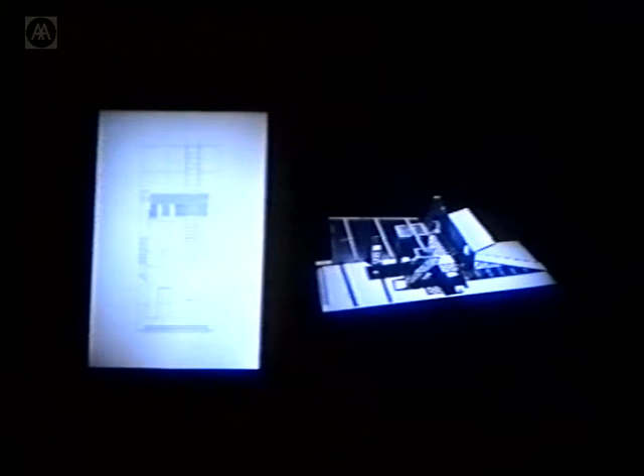It had an open interior. It had no doors, no enclosure. It was just an open pavilion, so you walked into it like you would into any shed. Inside it had some specific installations which were related to the themes and topics of his paintings.

Externally, it had a different expression. It sat within the formal late 17th century context of the former military hospital in Kilmainham. It sat in that courtyard like, it was described as like a crouched cat sitting there. The painter thought of it as a Trojan horse.

We thought of it because we had both worked with Jim Stirling in the late 70s, and Stirling used to always describe his Olivetti Haslemere as two badly parked London buses. So we thought of this as one badly parked London bus in the courtyard, and we wanted it installed in a way that spoke about its removal as well as its temporary, evanescent location.

We got very interested in the fact that it had to be put together and built in Ireland, then shipped to the Netherlands, then brought back, re-erected, and eventually taken away. So it was made in timber to be taken down into parts that had to fit into a truck.

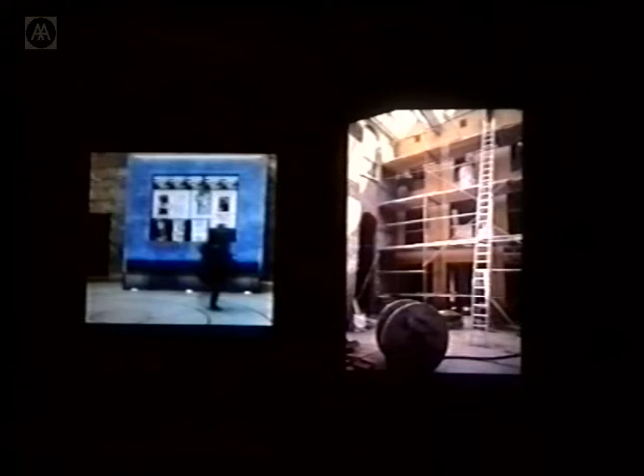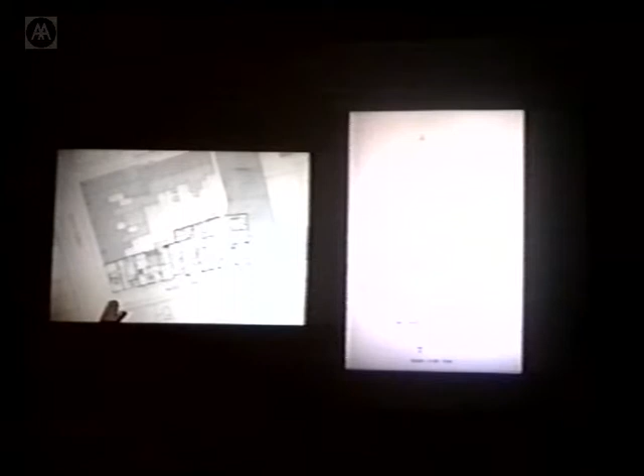And then we had the site sliced into plots, and Sheila and I were allocated plot 3, which is one of the 9-metre wide plots.

We interpreted it by imagining it as a big house, a house on the pattern of the Georgian houses in the city, and we tried to look at that idea.

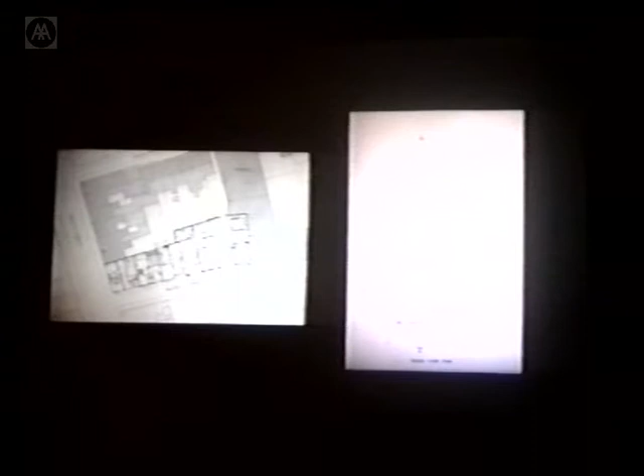That's the wrong one, isn't it? So now I need to go back here. No, now I need to go back this way.

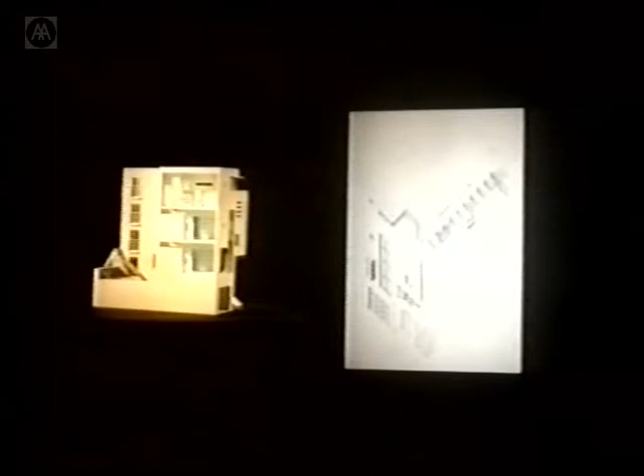We were looking at the idea of the Georgian house. If you look at a Georgian house in Dublin, the hierarchy of the house is completely legible on its elevation—the social hierarchy of the house.

And also, I suppose, the functions of the rooms, with the service in the basement, the kitchen in the basement, deliveries to the basement, the reception and entry up steps and in the main door on the ground floor, the piano nobile on the first floor, and bedrooms, and then the staff accommodation and nurseries under the attic.

Interestingly, those houses, so fixed in their form, have turned out to be the most flexible buildings that we have in the city—they're used for every kind of function. Whereas the buildings designed to be flexible, like the 60s office blocks, which are neutral in their form, turn out now to be the most inflexible set of buildings that we have, and there's not much that can be done with them except that for which they were designed.

So we were looking to make that strongly fixed or characterized form, but reassemble it to accommodate the change of use patterns and change of life. So we made each apartment interlocking, with high living rooms, small bedrooms, daylit kitchens, and a series of communal spaces that would give variety and scale to the pattern of daily life. This strategy of the cross-section produces another kind of elevation, and then we became interested in the weight of the elevation and in the presence of the brick and the modelling of the elevation.

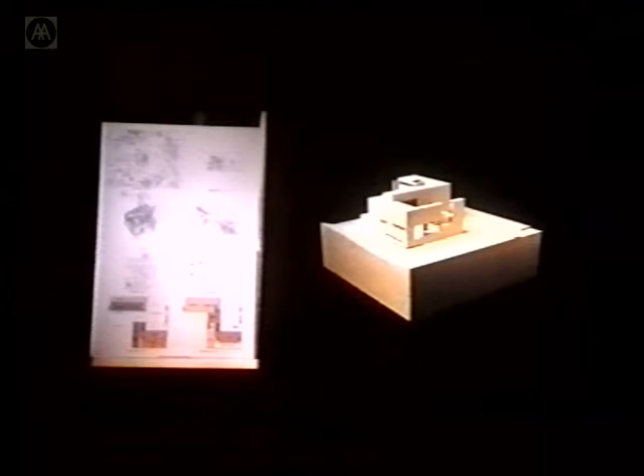We were very interested in the section, and in turning the interdependency of the plan into an interlock in the section, so that you could move both under and without the building in the same pattern of movement as you could move within the building. So the emphasis in the project of openness and accessibility could be translated in the experience of the architecture.

We tried to make a building that might feel as if it were a refined, reduced building in itself.

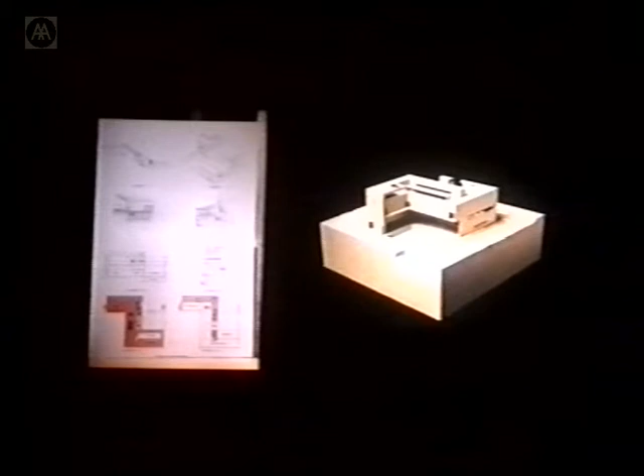Anyway, congratulations to Caruso St. John, and nothing is wasted — and we're making furniture.

Which is going to go into production, if we can ever make the prototype, made in plywood and steel. You buy one of these to hang on your wall, and it allows you to sit at your computer and keep your papers. And then you save up, and you buy a little one that comes to join in, where you keep the papers that you've had nowhere to put except up there.

And then you wait. And then you buy this guy that has a tall cupboard for your now accumulating pile of papers, and a hinge that closes up when you're not using it. And it's all made in plywood.

We worked with a joiner in the photography building, which as you saw was very much on-site stuff, so it's not all installed yet. But working with the joiner and the development of the joint in the plywood became a really intriguing subject. And so we're now busy making working drawings for something that I'm sure is going to change the working environment of 4 or 5 Irish people.

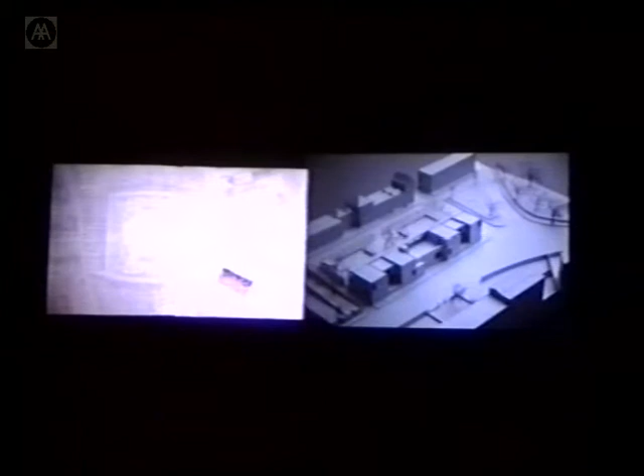And so we're making a project in this wonderful situation where the 18th century houses of the terraces are intact, and their relationship to the grounds in front of them are intact. We're trying to continue that by making a playground for the school, which will sometimes be a garden and park for the residences. And then we're making a school building to line the street, which is part of the architecture of the street. We're making it in brick with as few windows as we can manage, to keep a hard wall to the street, but more importantly, to make a space in the rear for the relationship of the school with its garden.

And this giant veranda, which is like the head of a carpet hoover, draws the children right into the school at break time and spits them out at lunchtime. We're making this building in brick and in timber and in stone. If you were able to see that slide, you'd see those things in the drawings. This is what we're referring to as some of our semi-cooked projects. These are the sort of intermediate sketches we're working on now. Very shortly, this will be happening, maybe this year, we think.

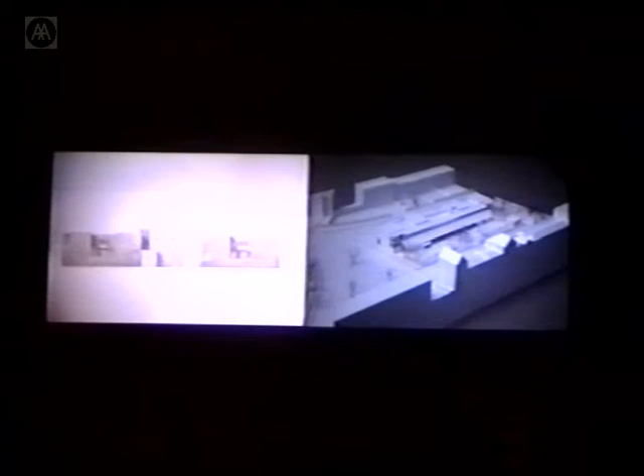Well, as John explained, we spent 9 years on that urban block in Dublin, and since then we seem to be getting projects everywhere in Ireland except Dublin. We've been moving north, south and west around the country, and we're beginning to feel we wouldn't mind having a project in Dublin again. It's a lot of travelling, but the work we've been doing has involved a lot of building in the landscape.

As in a case like this project, which is in Cork in the south of Ireland, in sites which are on the edge of the city and have some of the conditions of landscape and some urban relationships also. This project is for University College Cork, and the city of Cork is quite a small city of about 120,000 people, built on the River Lee, which goes out to the sea a few miles down to the south, or in fact to the southwest. The city is very beautiful. I think it's quite small and has a very strong sense of topography.

A lot of the hills in the centre and in the suburbs are very steep, leading down to the river banks and river valleys, which in an aerial photograph don't show very strongly.

The site we're working on is here, which is hard to see in focus. There's a long red building, an existing building, on our site, and the university is located over here, the existing campus.

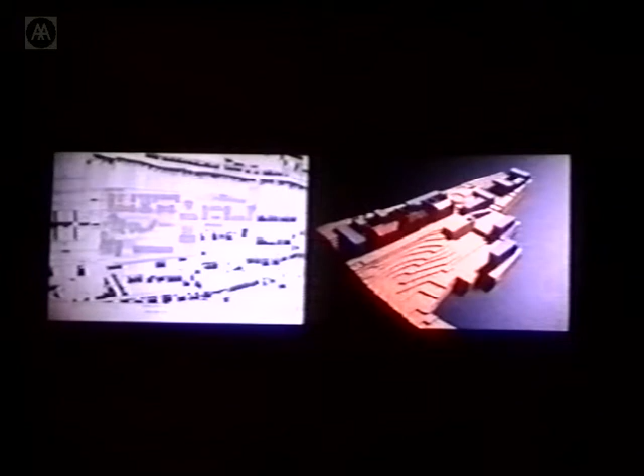This whole issue of the transformation of institutions has coincidentally become a major thing for us, because we've got two projects at the moment working on buildings with some kind of melancholy history. We found with the clients, among ourselves, and other architects, it's brought up a lot of interesting discussion about the reuse of buildings and the significance of a building's past. What we intend in this project and in our other project in Connemara is to transform the institution, but not completely wipe out its past, so that some sense of what went on there is kept in the future.

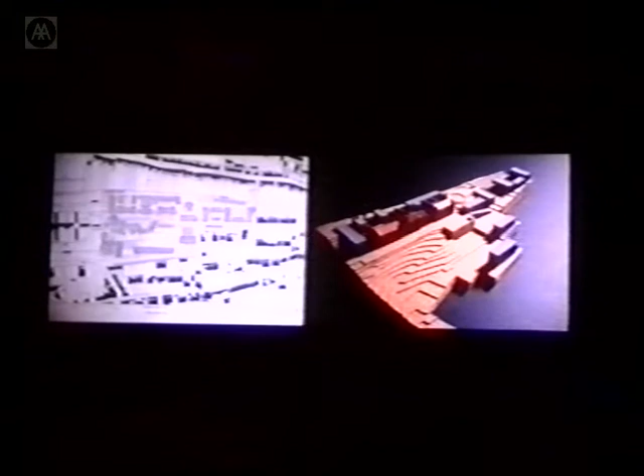What we're proposing is to retain the three buildings here. Behind those buildings there's a very interesting piece of the site, quite steeply stepping up to a big retaining stone wall all along the back. So we're making a series of new spaces and buildings at the back of these, which will be the core buildings, or the starting point, of the new university or new section of the university.

We're opening up entrances between the existing buildings into these new spaces and new buildings. We're also making a series of gardens using the terracing on the site, with a forecourt and stepping gardens down to buildings that define the southern boundary of the site. The model on the right shows some sense of the topography - if you're in these buildings, you'd be able to see over the roof of the others because of the steepness of the slope.

We're also making a series of new spaces and buildings on this side. These are part of a framework development plan we've made for the whole site, projecting how the buildings and lands would be used in the future.

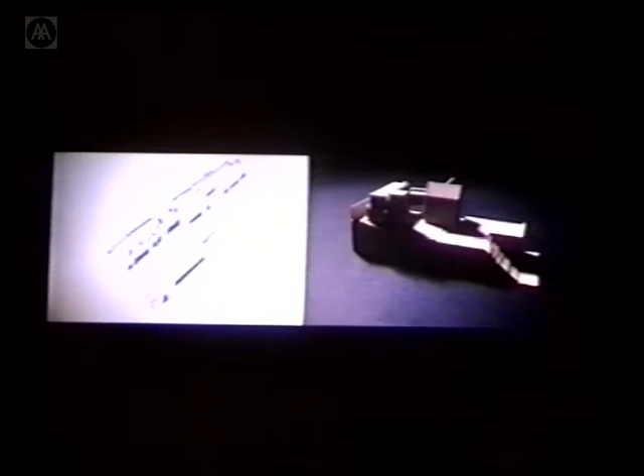We then started looking more closely at the buildings we're now working on a planning application for - the ones in direct relationship with the existing buildings on the site. The model on the right is a segment of just this part, the Social Studies and Adult Education Department for the university, where we're looking at ways of making new buildings at the back of the site, forming a kind of wall, and intersecting it with a lecture theatre that spans between the old and the new, giving a space underneath.

We found that the existing buildings have very fine spaces of a certain scale, but they're all quite big. So our new buildings tend to have small rooms and offices, while the existing buildings provide the larger spaces for teaching. Then we make bridges and ramps that connect the two.

On the right is the small model showing the existing large rooms in the building here, our new building at the back with small-scale offices, and then the lecture theatre which spans between them with ramps and bridges.

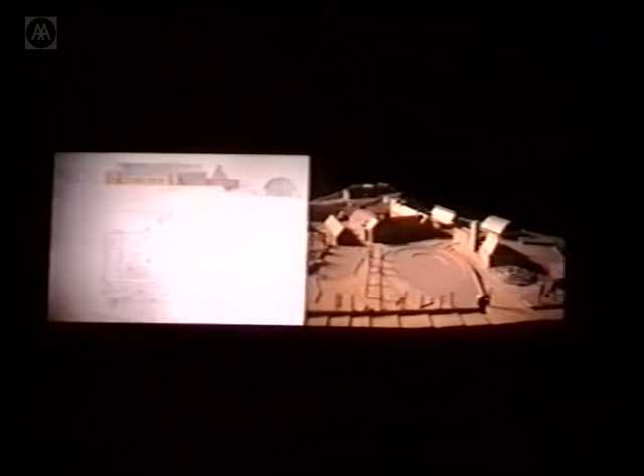For example, we looked at the windows and found that all the window sills were above head height, at sort of 1.8 metre sills in every room in the building. So on the ground floor, we proposed to extend the windows downwards by adding a little bay section so that people would have a view out of the building. They'd been working there for 4 or 5 years and had never noticed that they couldn't see out the window.

We came in and said, how can you manage working in this building? There's no view out. And they said, well, they'd never noticed this. So we're proposing to extend the windows downwards by inserting a kind of timber bay box, which would also be where the natural ventilation and opening part of the window would be, and give you a kind of workspace for your desk inside.

And then also by working with the existing external wall, we're inserting wooden porches and trying to work between the surface of the existing and the insertion of new elements. Materials were very important here, and because of the furniture college and the research centre, we wanted to use as much timber as we could.

So we're making a sports hall using laminated timber beams, some of which can hopefully be fabricated or worked on within the school in their workshops.

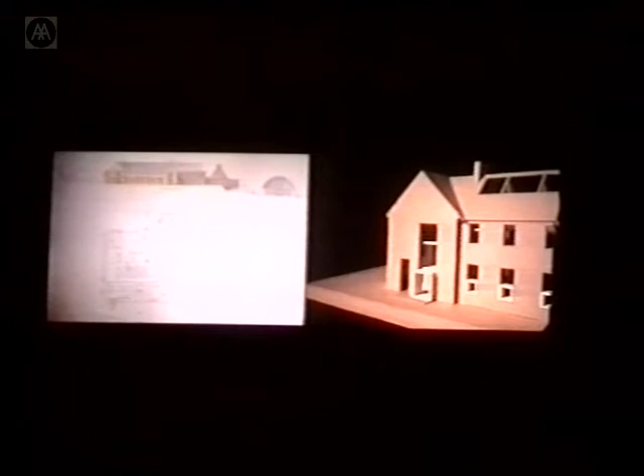And then we're using a timber structure in the machine hall, and a timber courtyard cloister. The building currently has a plan with no corridors, you walk from room to room. So we're attaching a timber cloister around the L shape of the existing building, which connects all the parts without breaking up the existing rooms, and allows the new machine shed to be connected in this zigzag shape with fire escape stairs at the ends.

And then we're proposing a new library and cafe in this area, and making what was a kind of exercise yard into a more pleasant garden for students.

The furniture design centre and research building is a small separate building, which has a timber tower, which is the water tower, and lift and stairs, and otherwise uses coloured render and some stone as a special feature.

This building is here. As you enter the site, you drive past the Furniture Design Centre to the old building. Placing a building here in front of the existing building was very important in terms of claiming the land in front of the site for the people in the village, and a sense that the Christian Brothers occupied this part of the site, and that they were now taking over the field in front. Putting this building with a public meeting room for lectures and local community meetings in the foreground would really give a sense of changing the relationship of the institution to the village.

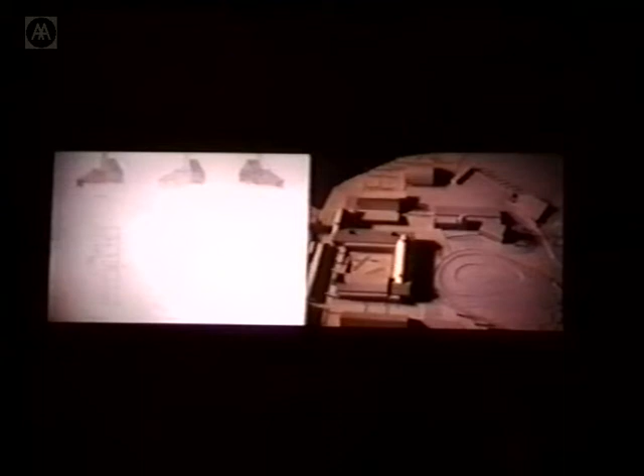These drawings are about the materials we're using, which are a combination of timber, render and stone, and metal roofs, turned stainless steel, which we've used in other buildings, trying to build up a kind of language of building and then working within the shapes of the ground, sometimes digging into the ground to make a kind of rolling landscape, or using forms in the land to relate the building and the landscape.

In particular in the model here, keeping the public entry at one level and then cutting back in at the lower level to make the service, so that the Furniture Design Centre has a public front onto the higher level and then the service entry at the back.

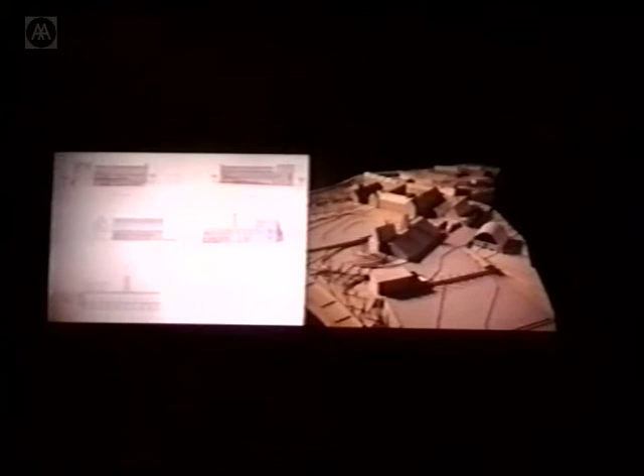And those are some details of the new building. On the right is the library, a new library on the upper level with a restaurant underneath, looking into a new garden that we're making.

Again, we're looking at timber construction for the trusses for the roof, and otherwise using masonry walls finished in coloured render. And this is the end of the timber cloister, which runs around the building, turns the corner and becomes a fire escape stair, attached to the old render of the existing building.

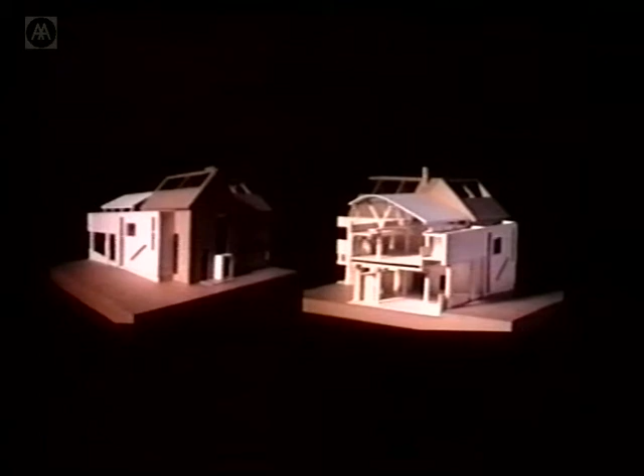This project is at a stage now where the design is reaching a level of development close to going in for planning permission, but we're just trying to define or complete our sense of what the language of the building will be.

Just up the road from that, there's another project for a community, a local arts centre. This village called Tully, also in Connemara, is a typical Irish village of one street, with, in this case, buildings only on one side. There's a building here called the Teach Ceoil, which means the House of Music, built by the same group of people, or by an offshoot of the Connemara West, for Irish traditional music and dance and performance.

There's a huge increase in interest in the whole subject of traditional music and dance, both locally and internationally. A huge number of people come here every year, particularly in the summer, to listen to music and to get involved in dancing. They wanted to expand this and make a place for greater level of performance, for people to participate, and to have an archive for traditional music.

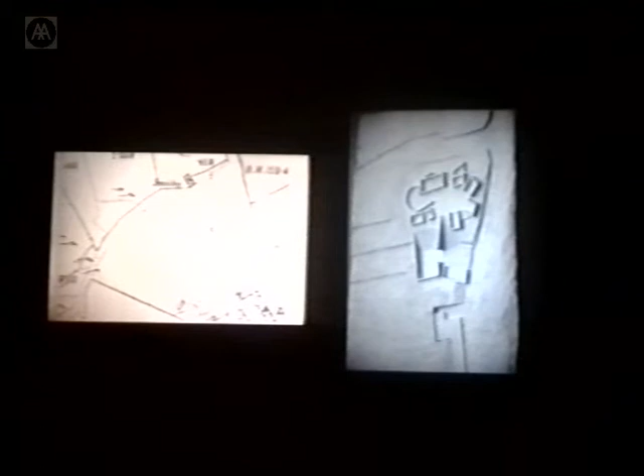This can be seen maybe more clearly three-dimensionally in this relief model, showing how we were stepping up with the existing hill to make this sort of amphitheatre entrance, and making a collection of spaces around this new internal space. The relationship with the village was quite important—how you move and how the angles of the building relate to the street as you move through.

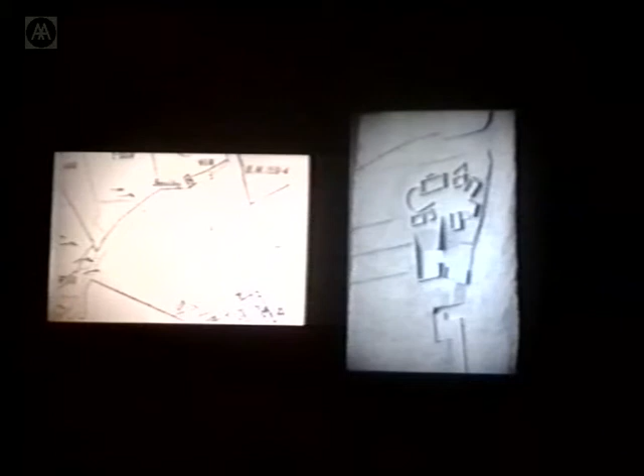That way of thinking about how a building might work on a site which is not particularly urban but more open was very important in the Blackwood Golf Centre, which we finished in 1994, early '95, in an amazing landscape in Northern Ireland—an old, mature landscape of an estate of a big house.

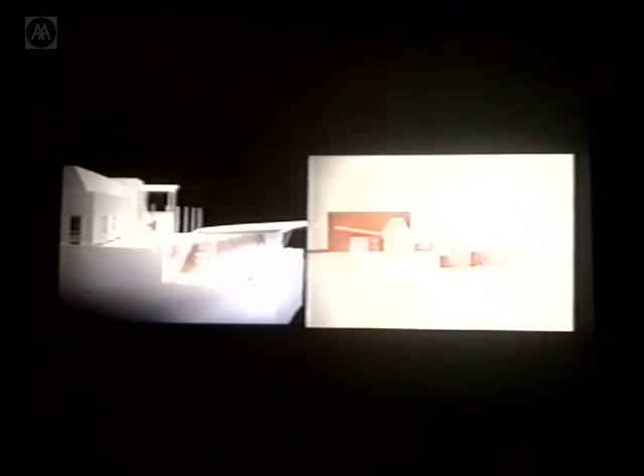It uses the section of the land which came down as a slight hill. We have used this to make a step where the driving range is set down into a cutting, then the landscape slopes down that way, so that you could have the entrance through a porch into a reception hall, out into this courtyard, and then you could overlook the driving range or look across the roof of it out to the landscape.

So the building is about arriving from a car park through this porch into the reception hall, from which you can go to bars and restaurants, the changing rooms and the golf shop. Then there's the courtyard space, the external space, which is the kind of defining space in the building, between the driving range and the bridge to the first tee for golfers, at the end of the space.

We were interested again in the materials and in the relationship of the building and the landscape. We looked at a lot of traditional Irish agricultural buildings, which are very often red painted corrugated iron and have very strong forms in the landscape.

We wanted to relate to that tradition, but also to use a different kind of palette of materials, and obviously make something more permanent than a shed, a farm shed. So the main materials that we used were the red render, a self-coloured render which we imported from Italy, which has this colour that's like the rural agricultural buildings.

And then we used western red cedar for the wooden elements, which is a naturally weathering material, so that it starts as a kind of very warm yellow colour but gradually becomes more and more grey and silvery. The idea of a building that develops a pattern and changes over time seemed very important, using a material that has its own character. The cedar has a preservative that comes out when it's wet, which gradually develops a kind of powdery coating.